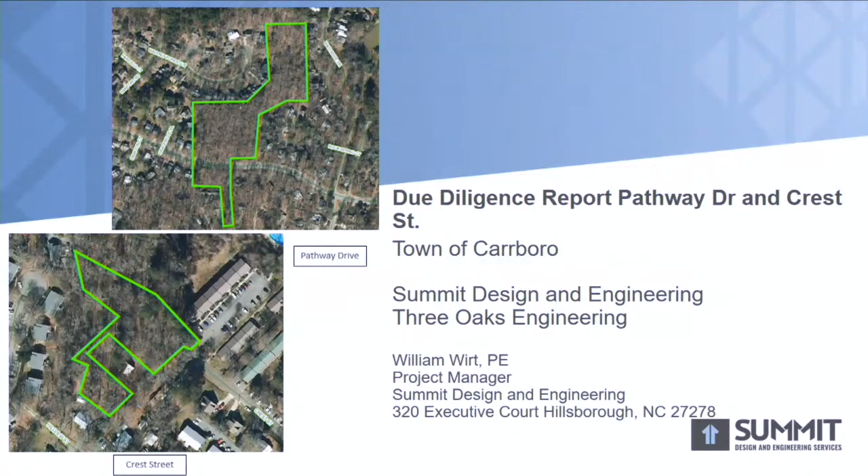It covered four categories: an existing conditions survey and a tree survey, which covered topography, existing buffers, easements, and encroachments, and the tree inventory. The existing conditions survey is exactly that—it's supposed to convey what is existing on the site. It's not necessarily used for platting purposes or as an ALTA, it's not necessarily legal, but it's used as a starting point to begin site design and site analysis.

The geotechnical report's points of focus were analysis of existing soils and groundwater conditions, depth of rock, which there is a lot of on both sites, recommendations for the foundations you'll need, the type of subgrade treatment you'll have to perform if you decide to build here, and then pavement design as well.

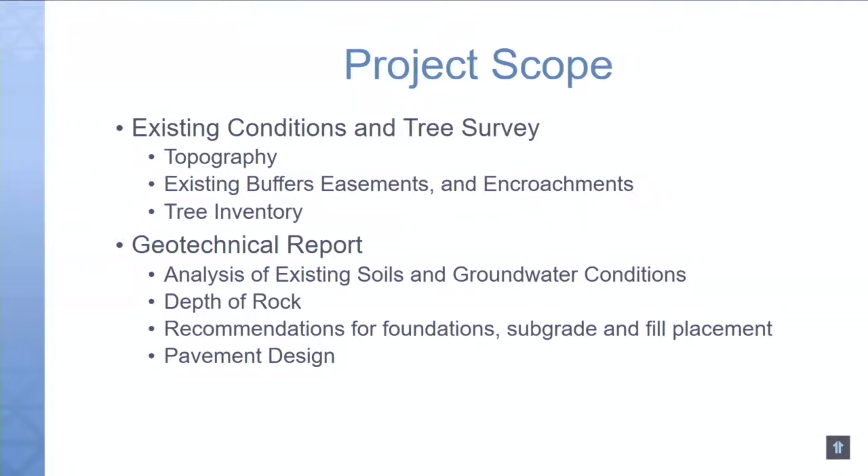The last two are the environmental reports: Phase 1 environmental site assessment, the ESA; the wetland, stream, and buffer delineation; and the protected species habitat assessments and surveys. Those last two items are what Three Oaks provided. The preliminary stormwater impact analysis, the SIA, reviews stormwater management requirements as set forth by Carrboro. Since Carrboro is the authority having jurisdiction, you might see the abbreviation AHJ in the presentation.

It also presented stormwater control measures. As some citizens pointed out, we did not design stormwater control measures—we only listed ones that would be effective for this site if you chose to develop. Low impact development was another point of emphasis; we were asked to look at it. It's exactly what it sounds like: how do you specify requirements for the development you're proposing so that you have a lower impact on things like stormwater runoff, affecting groundwater, tearing down trees, and clearing the site?

So I'll start with the survey. I think you know the subject site, Pathway Drive, pretty well. It's really made up of three properties: the first one is bisected by Pathway Drive, the one to the east side here, and then the one most north, which is bisected by a perennial stream and is buffered. You have some sewer easements on there, and they're all zoned some form of residential.

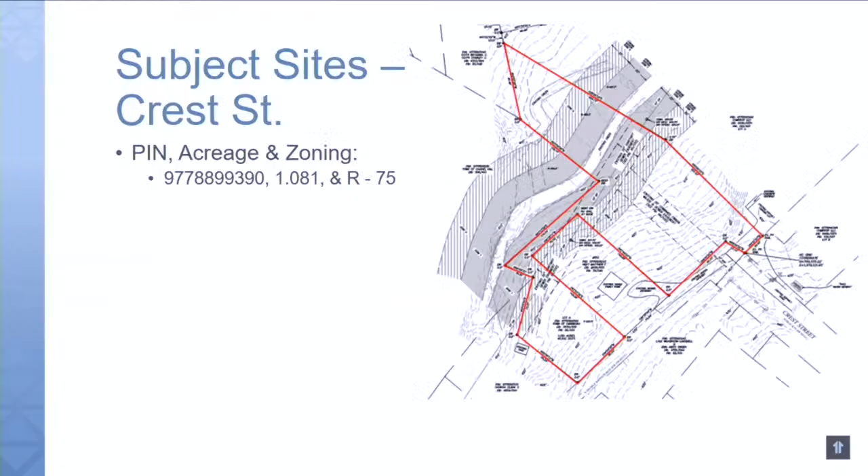Everything flows towards the stream. Let's go back real quick—there it is. Everything goes towards the stream. Even most of this topography here, which really slopes off into neighbors' properties in development, you would end up directing all of that way.

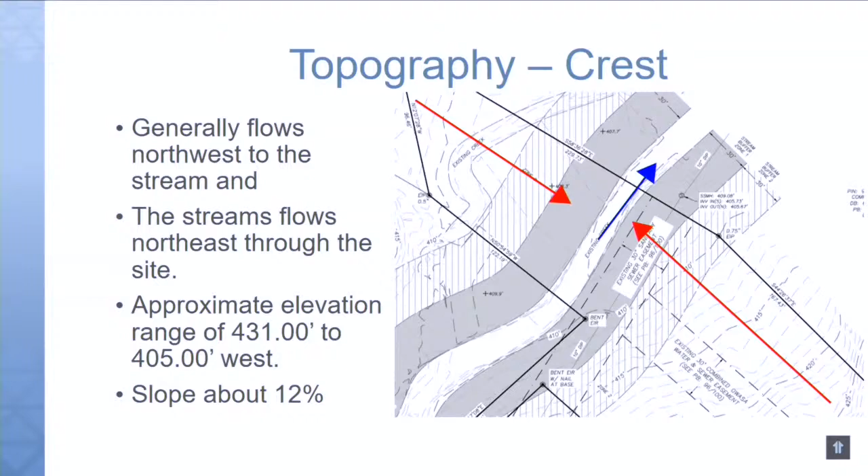Crest Street is pretty much the exact same situation, just smaller. You have a much shorter flow path across your site to get to your stream, which eventually carries all the runoff off your site. So you have an even steeper slope, about 12% in the main area where you would build. We'll discuss buildable area in the stormwater report.

We also look at, with existing condition surveys, what type of restrictions are on your property. The biggest ones are buffers and easements. On the subject sites, you've got water and sewer easements, with one combined easement where water and sewer run together.

Stream buffer, which was pulled from the Town of Carrboro's GIS, lists Zone 1 and Zone 2 as 30 feet. In the environmental investigation, since those have been recorded on GIS, they've actually been updated to be much wider than 30 feet, so those would need to be updated into development plans during your permitting process if you choose to move forward.

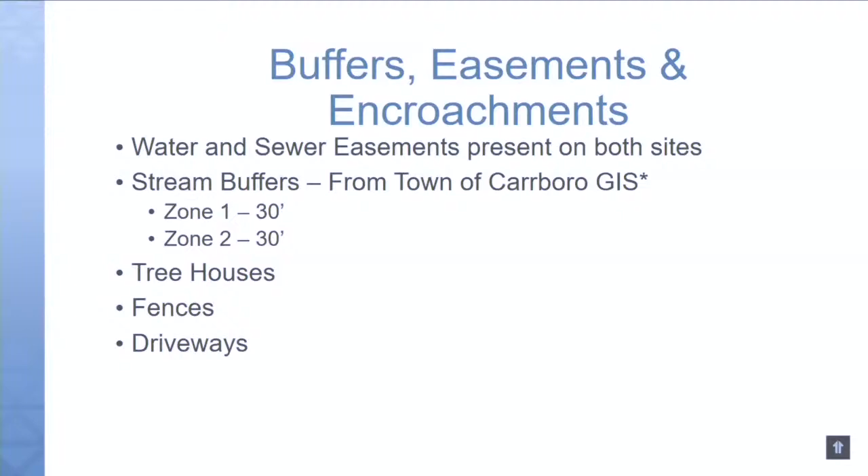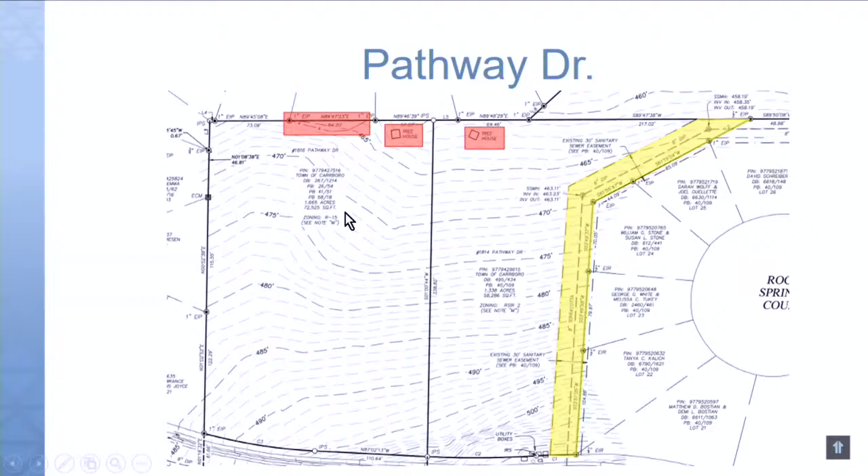You've got some tree houses on Pathway, some fences, and some driveways that encroach. That's obviously an owner decision on how you want to deal with those. The sewer easement here on Pathway, just north of the site, is highlighted in yellow. It looks like you have the majority of the easement on your site, but a little bit comes onto the neighbors' properties and encroaches there. You've got existing tree houses that were picked up and a fence line going up.

So we rotated the map so we could see it a little bit more - north is this way. Still on the Pathway Drive site, here at your creek you've got another sewer easement running along the creek, which is typical. You gravity your sewer, and so typically sewer outfalls are located close to streams.

You'll also see buffers here. Your Zone 2 buffer is 30 feet as defined by Carrboro's GIS, and Zone 1 is also 30 feet. You also have ephemeral streams here, which we'll talk about shortly, and those are buffered as well as Zone 2.

Zone 1 and Zone 2 have different restrictions based on the AHJ, Carrboro, or if there's a watershed restriction like Jordan Lake's watershed, restricting what you're allowed to build in those zones. You might be able to encroach on Zone 2 with fill slopes, but you might not be able to touch Zone 1 at all, depending on the regulations set in place at that site.

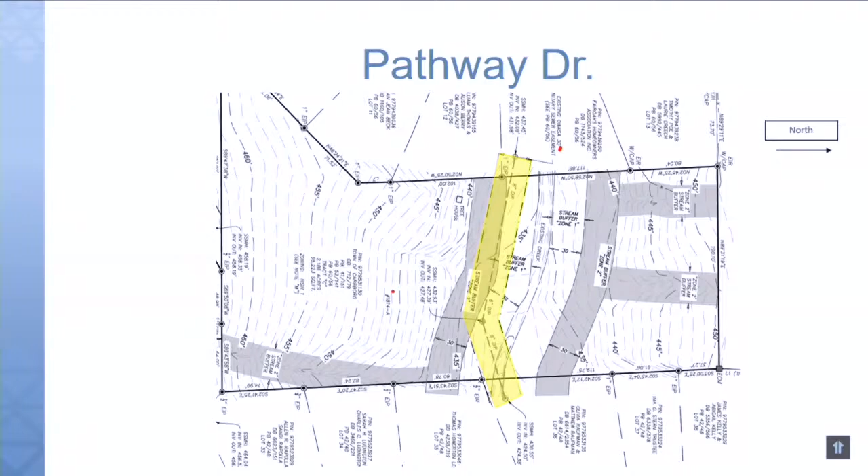Crest Street - again, sewer easements, water line easements, encroachments, and buffers.

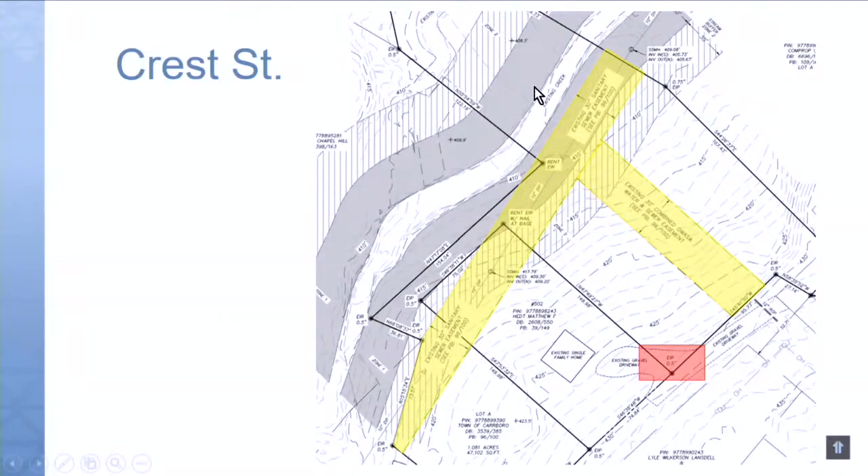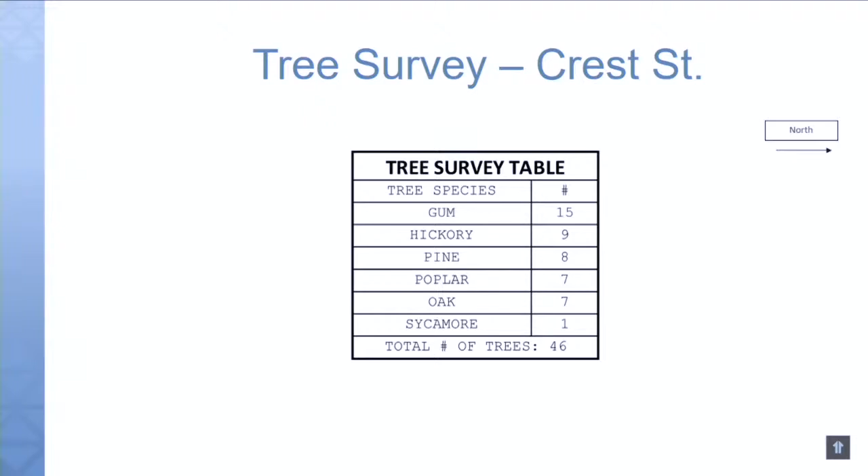The tree survey was provided to count the trees. All of the trees that qualified were large caliper trees, typically 12 inches in diameter or bigger. They are identified so the developer can understand the impact of clear cutting the site, what kind of species you'd be taking down, and depending on your landscape architecture requirements, what kind of species you might have to put back in development. Pathway Drive has 312 qualifying trees, and Crest Street has 46.

Okay, so soil conditions, your geotech summary here. You're located in what's called the Slate Belt in North Carolina. You have a lot of rock on this site, volcanic and igneous rock. Weathered rock is a subcategory of that, located a little higher towards the surface typically, starting to break down and become soil, but still hard to rip out of the ground. Bedrock is even harder. We found weathered rock at 5 borings, bedrock at 3 borings, and groundwater at 1 boring on Crest Street at about 3 feet deep. You can expect to find groundwater higher in the soil strata as you get closer to streams.

The geotech report listed that the soil conditions of the site are suitable for development. I'll take a minute here to clarify that - they mean suitable for development, or we mean suitable for development in the tight scope of geotechnical analysis, meaning you can build on this material on your site. There's nothing particularly restrictive - no super high groundwater. Rock is good to build on because it's stable and your foundations won't sink. So from a geotechnical perspective, it's suitable for development.

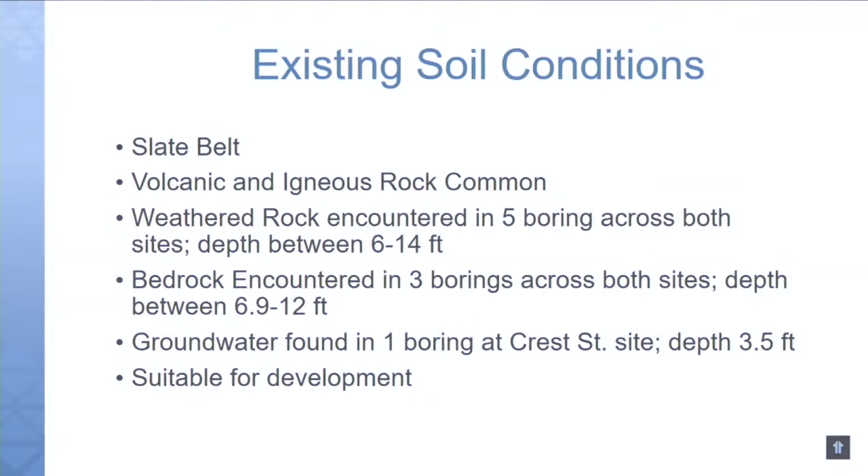The recommendations were listed. Foundations—the top two there, spread footings and continuous wall footings—are typical of what you'd find on a single family home, maybe some townhomes. Monolithic slabs and turn down footings can also be found on those, think slab on grade houses and things like that.

If you don't have a structural design for your maximum load, the building code defers to 2,000 pounds per square foot, so what's found on site is suitable for that bearing load. If you decide to develop, you'd go in and do further geotechnical investigation, as some people have pointed out. Then if the structural engineer provides load capacities, that bearing pressure could go up.

Controlled fills are good. CL, ML, SM—those are all types of soils, clay and silts and sandy silts, which are good to build on. Density requirements for putting those in are all 95 to 98% compaction.

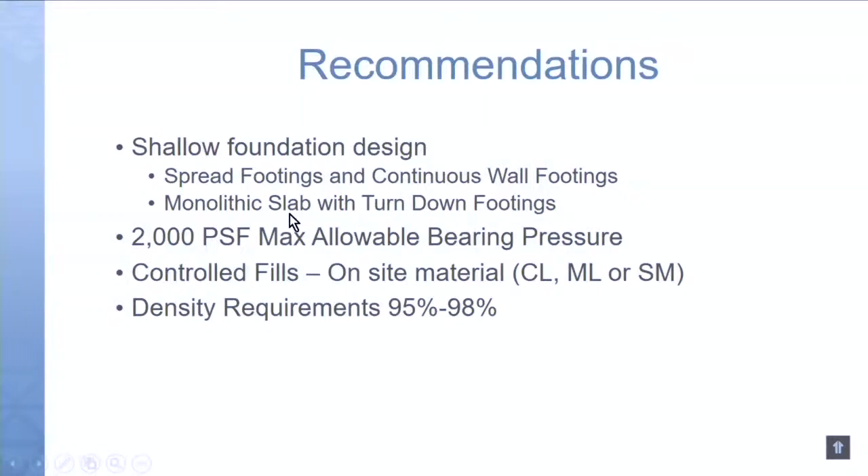Alright, environmental reports and summary. So the phase 1 ESA is performed per the standards set forth by the American Society for Testing and Materials, ASTM, and all of the findings in this report are based off of the standards set forth there.

No environmental concerns were identified as part of these sites, and no significant data gaps were identified either, meaning all of the records kept on this site as far as environmental assessments go have been continuous through the years as it's been sold or looked at for development.

Mr. Work, could I pause you there? Would it be a fair summary to say the ESA Phase 1 report—what you're basically saying is you're confident that nobody dumped petroleum products on the site, and that those records could not have gone unfound had someone done that? Is that sort of a general summary? Correct, based on the standards set forth by the ASTM. I just want to be clear about what that scope is not. When you're talking about environmental hazards, you're talking about a specific kind of environmental hazard and data about it, rather than the broader common use of the term. Right, you could think like dumping hazardous material on site.

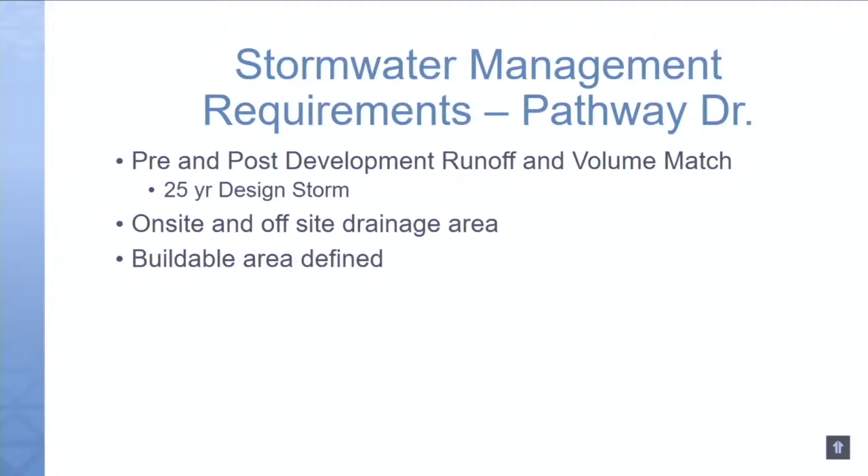This is up to the 25-year storm design. There was some mention about the 100-year storm, but again, that's a Carrboro regulation. Any development is subject to the rules of the AHJ, so 25-year is the limit.

We considered on-site and off-site drainage areas, which we'll look at in a second. On Pathway Drive, we defined a buildable area, shown as the red hatched area here, and south of Pathway Drive here. We considered buildable area for a couple of reasons on Pathway Drive. One is because you have a large area that is unencumbered by easements or stream buffers.

You have two ephemerals that you're touching there. Those are much easier to impact from a permitting standpoint. And it was to achieve a conservative design in the due diligence analysis.

For example, in reality, based on your zoning, which we didn't investigate too much because zoning would be linked to a concept plan that was not part of this scope, let's call buildable area anywhere you're putting a house, grading, a road, or a parking lot. It's not necessarily impervious area, meaning not necessarily asphalt, roofs, or buildings, but for the purposes of this analysis we considered it as such.

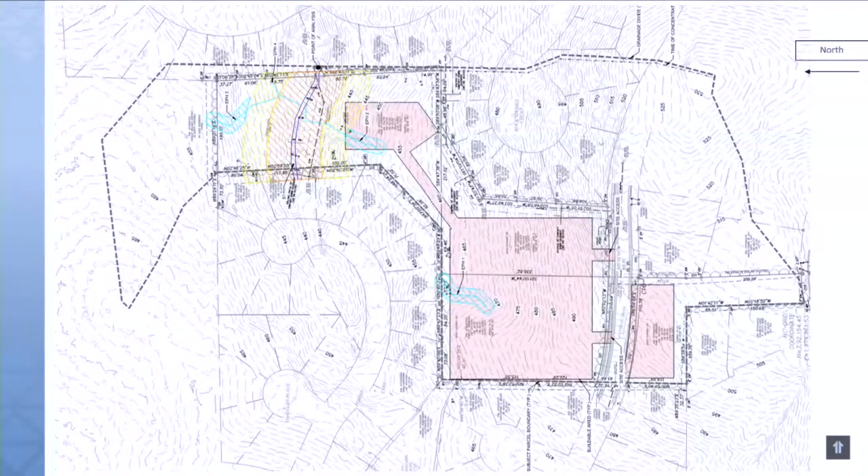So you've got pre-development. We run all sorts of calculations and analysis to come up with these basic numbers. I'll try to go through them quickly. Total area is self-explanatory - between the three parcels, you've got about 13 acres.

Your composite curve number is a number we assign based on ground cover conditions in pre-development. Because you have a lot of rock and your soil types are what's considered D hydrologic soils, there's not a whole lot of infiltration naturally going on right now, as evidenced by those videos. So 70 is really pretty high.

It's out of 100. Once you go into post-development, we considered post-development based on the drainage area maps. Post 1A is the buildable area we're talking about here. We have a total area of the buildable area - 1A is a drainage area.

The total area is 6.06. The buildable area within there is 3.15. And then the area to remain forested or pervious is 2.91. That comes to a curve number of about 85.

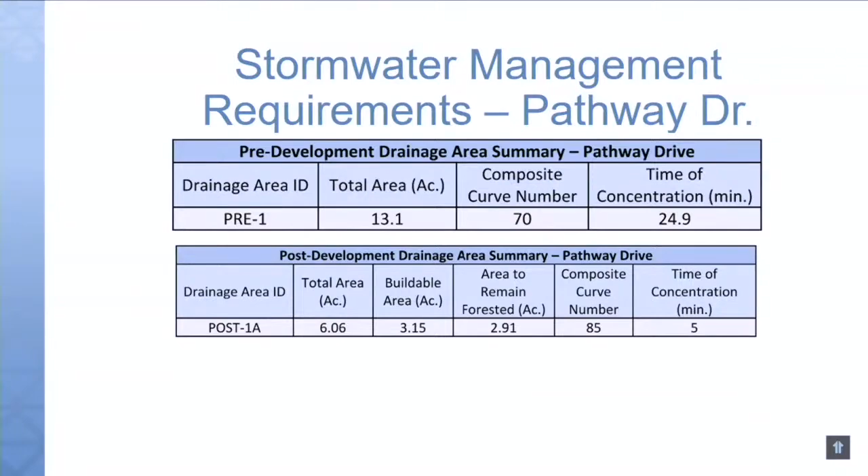Your time of concentration is how long it takes your flow to get from the highest point of your drainage area down to your lowest drainage area. So in those videos, you're at a low point in your drainage area - you're seeing the maximum runoff from a very large drainage area.

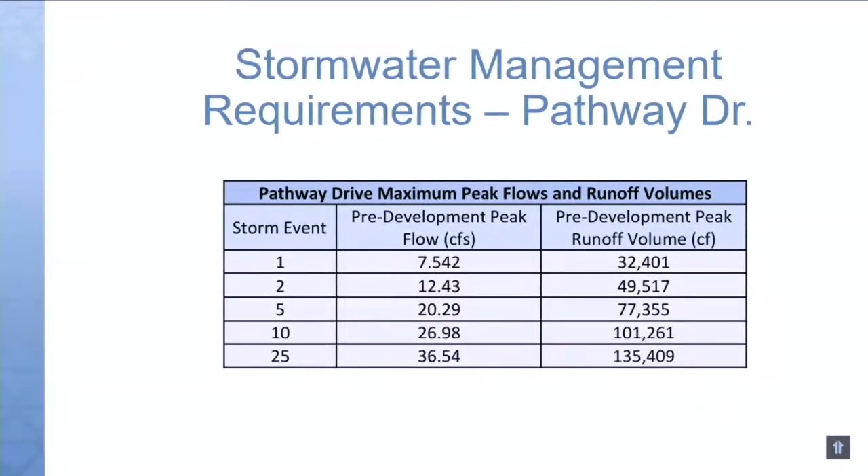The videos that have been shared, with that rainfall data, indicated there's somewhere between a 10 and 25-year storm, probably on the upper end of that range. Your flows are much higher, and so is your volume, obviously. We'll talk in a minute about how you can reduce runoff, but also reduce volume by putting it back into the soil.

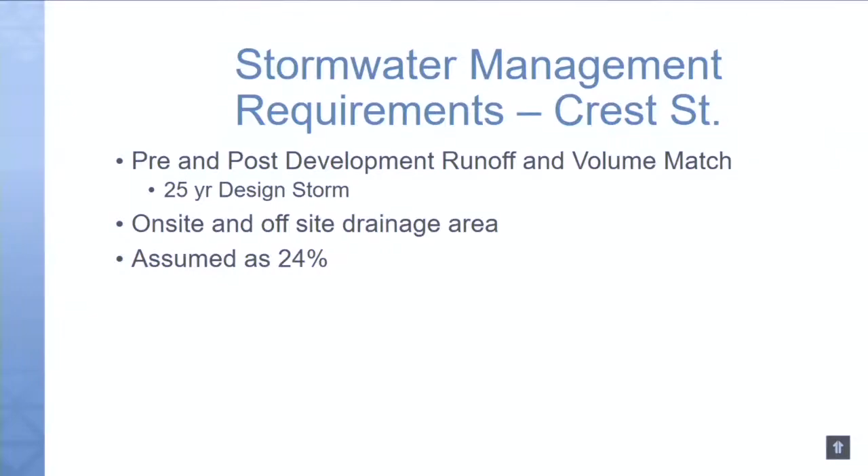Crest Street is largely the same deal, but because of all the buffers that impact the area of the Crest Street site, we didn't define as much of a buildable area here. We just assumed 24%. That's pretty conservative, given the restrictions of permitting in buffers and the topography.

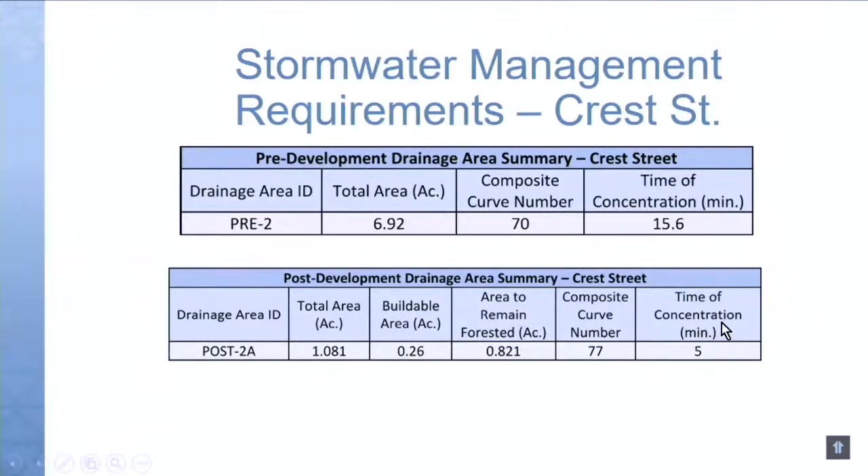Again, Crest Street's numbers come back largely the same. Time of concentration pre-development is really high. In post-development, it's really low. And your runoff and your volume numbers are provided there as well.

So for water quality, all of Carrboro is the authority having jurisdiction. Now, if this were to go to full permitting, because Carrboro is also the owner of the site, your staff might not be able to review it, so the state might review it. However, the state's still going to look at Carrboro's land use ordinance.

Article 16 covers most of the stormwater requirements, which require 85% total suspended solids removal, and then nutrient reduction as well, which is nitrogen and phosphorus. You're trying to keep those targets at the quantities listed there, and that's to reduce biological impacts to your streams. So all of your runoff is not only retained, it's also treated through those SCMs.

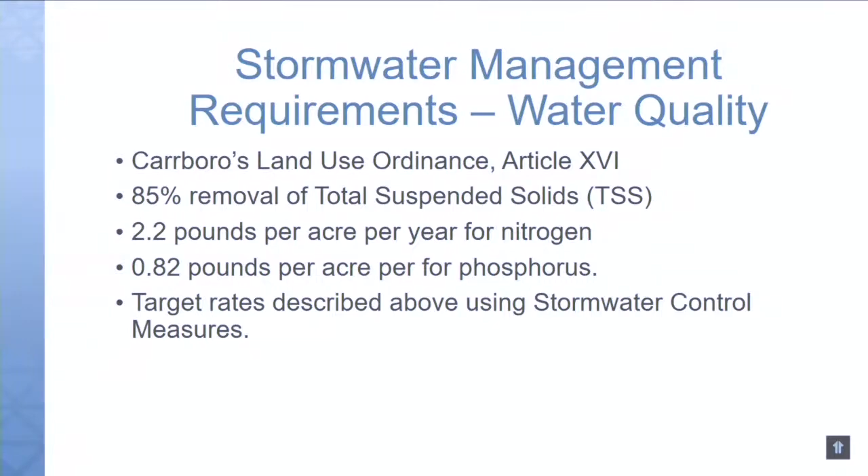So, stormwater control measures. We identified 4 that would be useful here, and gave you some pros and cons for them. Wet ponds, think of your typical pond, that's what a wet pond is. Large volume and runoff reduction, it's really good for handling that. It takes up a lot of space, so you have to reserve a lot of space to build it. It takes a lot of grading, a lot of clearing. It is the least expensive option at scale of the rest of the SCMs identified.

Bioretention can be any multitude of things. You can split them in cells across the site. It allows for improved infiltration, because there's a component of bioretention for infiltration through an improved media in those devices. So instead of just controlling it, letting it sit, and running it out through a pipe or structure, you're actually putting it back into the ground. If it can't go into the existing ground because you're on rock, for example, it's put in pipes and let out the structure. With that infiltration, it can typically take up to 72 hours. That's an option for greatly reducing volume and runoff.

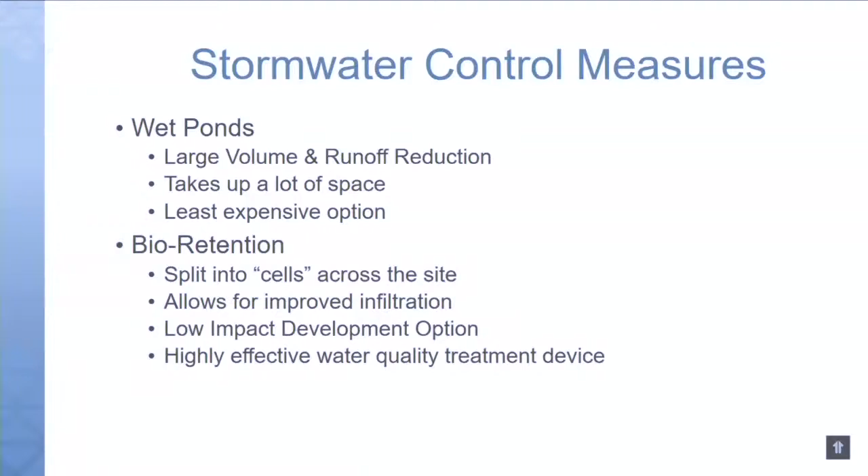It's a low impact development option, which we'll talk about later. It's very effective as a treatment device. Underground storage is expensive. It reduces your visible impact on the site, and it allows for the most density typically, because you're not reserving any surface area to construct it — it's all going underground. Depending on your target stormwater rates, these usually have to be really big, so they get to be really expensive.

Then permeable pavers, which is one of the best low-impact development options. Think of a parking lot full of pavers, and underneath the pavers is a large section that runs the area of your parking lot or road or what have you. All of the water infiltrates through there and does the exact same thing I just described with bioretention. If it can't infiltrate into the existing soil, it gets picked up in pipes and released out very slowly over the course of 72 hours. Permeable pavers are good because what falls out of the sky is immediately going in, infiltrating into those.

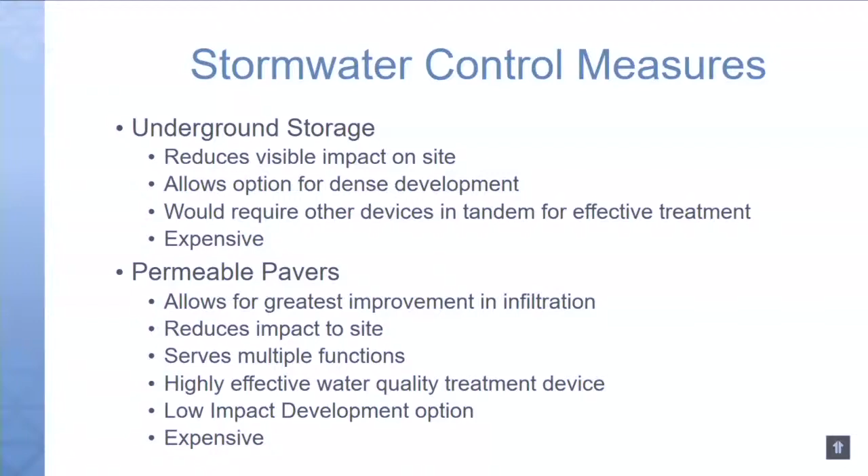The drawbacks for them is that they're also expensive, and they're also difficult to maintain well. But if they are maintained well, which takes a lot of effort, then they're highly effective for volume reduction and for runoff reduction.

So the last thing we looked at was low impact development. Listing a few things quickly, obviously limiting your site clearing. That's a choice the owner would make depending on density. If it was a private developer, they would want to maximize density because they want to maximize profit.

Promoting tree conservation goes along with clearing. Bioretention, like we just talked about. Providing shared driveways instead of single driveways for each house to reduce impervious area. Relaxing setbacks, so if you can put houses closer up to property lines and roads, you have a smaller area to connect to provide connection to those houses. Think reducing sidewalk infrastructure, driveway infrastructure.

Undisturbed buffers, similar to the stream buffers, providing those along the property line. Permeable pavers, which we talked about. Disconnected impervious is basically, instead of putting all your runoff into the ground into pipes, you allow it to disperse over a large pervious area that's improved maybe with better infiltrating soil, lots of vegetation, so that it's not coming out concentrated at the end and washing out and scouring streams.

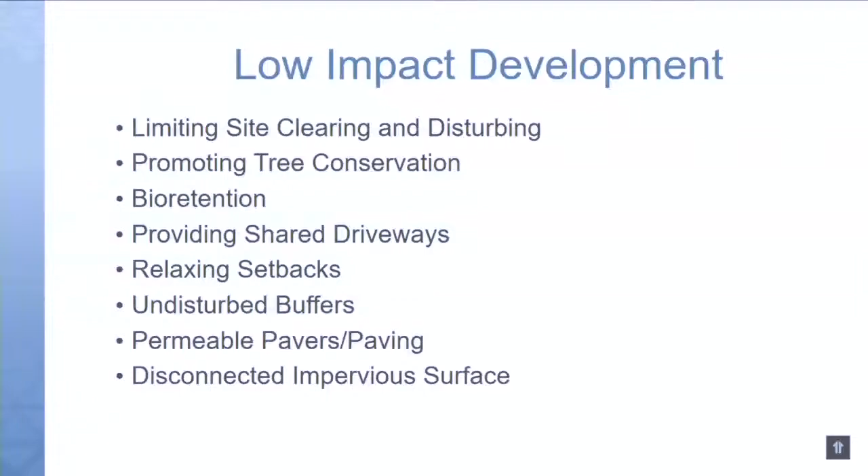Diffuse flow is that same concept. And then maintaining existing wetlands - if you have wetlands on site, keep them there. Those are natural stormwater control measures. And rainwater harvesting is a green option for keeping your rainwater and using it for things gray water is allowed to be used for, like irrigation and things like that.

So basically, in conclusion, no concept plan was provided with this scope of work. The development, obviously, everything I just described is ultimately subject to the authority that's going to review it. If anything here is in violation of that authority, it's going to correct it and make us meet those particular standards. I think the buildable area is probably a lot higher than what's going to be feasible, so it was a conservative design approach. In reality, the AHJ is going to have concerns, and the review process will likely reduce items like that.

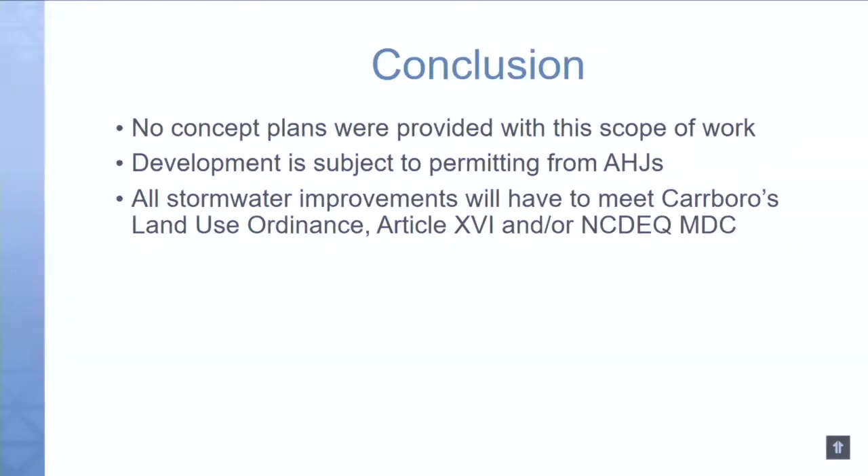And then all stormwater improvements will have to meet Carrboro's land use ordinance, Article XVI, and any state standards as well. Sometimes the municipalities defer to state design standards, particularly for SCMs. So anyway, we appreciate the opportunity to present this to the town, and I'm available for questions. And I believe there will be a public engagement component to this as well to answer questions in the future.

So, thank you, Ms. Swart. Council members, Councilmember Frey has had some questions. Anyone else? Our instructions are to receive the report and ask any clarifying questions about it. Madam Mayor, I think I got my questions in during the presentation. Thank you.

This is, I think, pretty basic clarification, and I suspect I have my answer. But when we talk in the context of this report for suitability, we're not necessarily talking about desirability from a subjective standpoint, which is to say, this is not really in the context of comparison to other regularly developed kinds of land. It's strictly a potentially doable assessment. Correct, if the goal of the report is to offer no opinion, only the objective analysis of what it would take to build on the site.

You could put a skyscraper on the site - you would obviously never do that. So the goal was to have no opinion, no desirability, like you say. Thank you. Yeah, I think that's really just for some of the community conversation around the sort of concept of suitability identified here. But I appreciate that clarification.

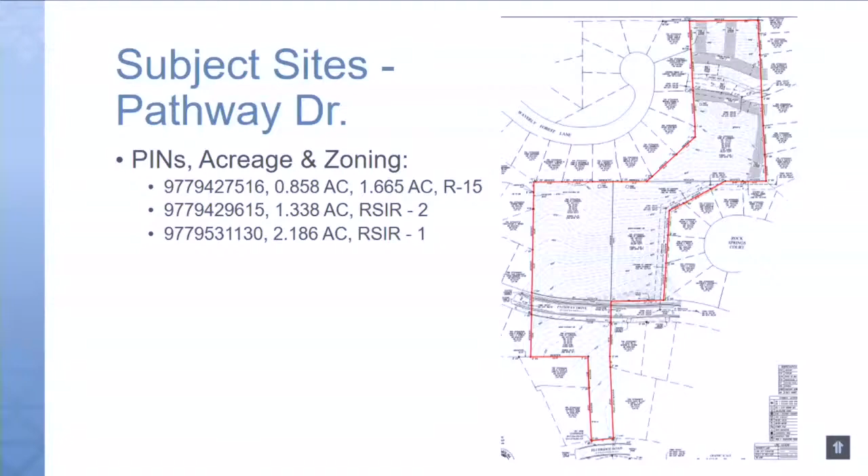Again, pretending you're a private developer here, I don't want the site. So those are some of the components and decision making, or some of the analysis you could do to decide whether you want to move forward with concept plans.

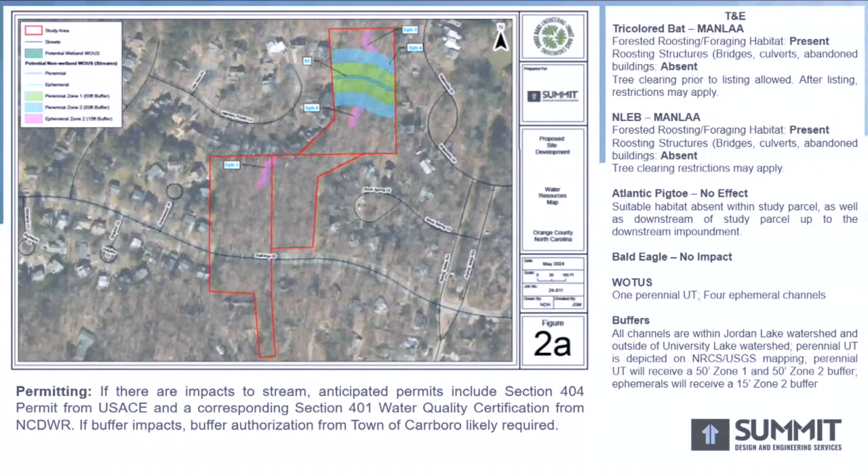And then the other thing I would add is what we see is sometimes projects go all the way through a concept plan all the way to what we call a pre-application meeting. So we go and meet with the authority and say, this is what we're thinking, talk to us about the regulations here, what are we missing, what did we miss in the land development ordinance. And then sometimes it gets killed there after you've put in quite a bit of capital to investigate whether it's actually desirable to do.

I really appreciate it. I do appreciate, I mean, I went through the geotechnical, I'm going to go back through it. I mean, I happen to like that stuff, but it, you know, it's an extensive report.

Is there any other information that we need regarding the, what did you call it, Oaks Environmental? Three Oaks, yeah. Their report is a part of the overall report. Everything that they've provided is as detailed as it would need to be for anyone in the industry, I'll say, to make a decision.